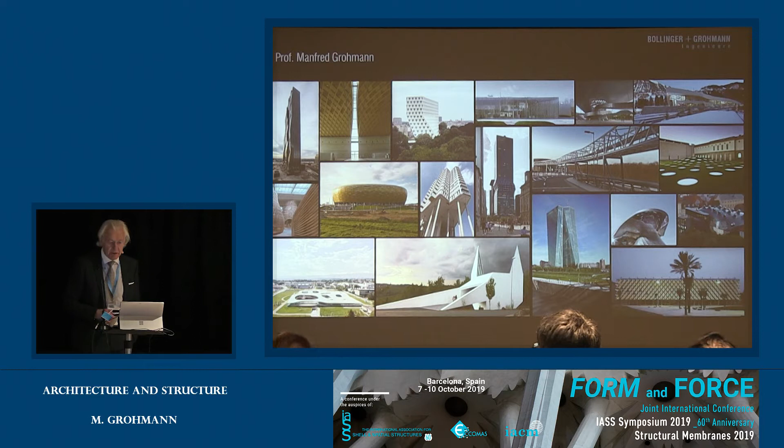Preparing this speech, I've been questioning myself: why am I standing here? I'm standing here since I'm working together with this wonderful, wonderful bunch of people. Almost 250 of them spread almost all over the world. We are in Europe and also in Shanghai and Melbourne. And without these people, none of these projects that I want to show you now would have happened.

So I want to talk about the past, the future, and the present, so about everything. And I start: the first project is pretty much connected with music, with jazz music, which I'm a big fan of. And this is Joe Zawinul. He was an Austrian jazz musician, and he was the man behind Miles Davis moving into electronic jazz. He was a keyboarder for things like Bitches Brew. And later he joined with Wayne Shorter for the group Weather Report.

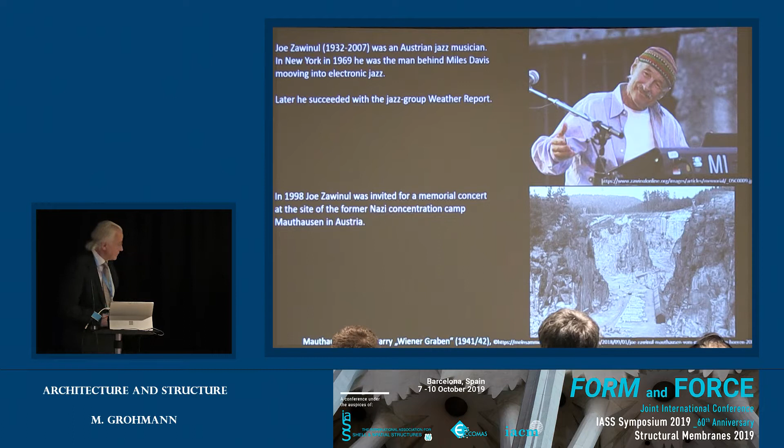And in '98, Joe Zawinul, since he came from Vienna, Austria, was invited for a memorial concert at the site of the former Nazi concentration camp in Mauthausen. And the site is quite an impressive stone quarry. So to have a concert there, the idea came up of having a cable net spanning over this quarry for two purposes. One is for an acoustic sail above the stage to improve the acoustics, and to find a place to hang the loudspeakers and all the spotlights necessary.

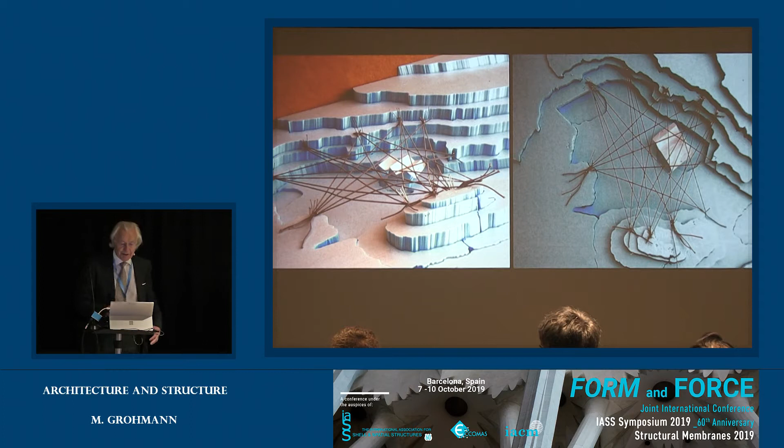Well, in '98 digital tools were not so available. I will come back to this issue also for the other projects we did in the 90s. So we tried to set up, you can see, a very rough model, to identify the points where the cable net could be placed, and then of course you have to define the length of the cables, and here we could cooperate with a very, very competent contractor from Austria. And this is then the acoustic sails above the stage, and this was the event, though it was just a temporary structure, just for one night, for one concert.

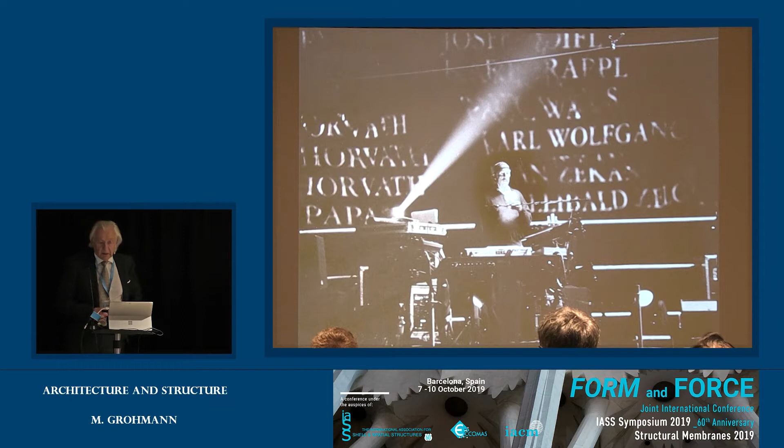The next project is also connected with art. This is about Tomás Saraceno. For those of you who attended the Hamburg Symposium 2 years ago, we had Tomás Saraceno as a keynote speaker. Tomás studied in Argentina, in Buenos Aires, and then he came to Frankfurt to do a postgraduate architectural study at the Städelschule. That's where we met Tomás, and for more than 20 years we have been cooperating with him. And he had come back to explain what you see.

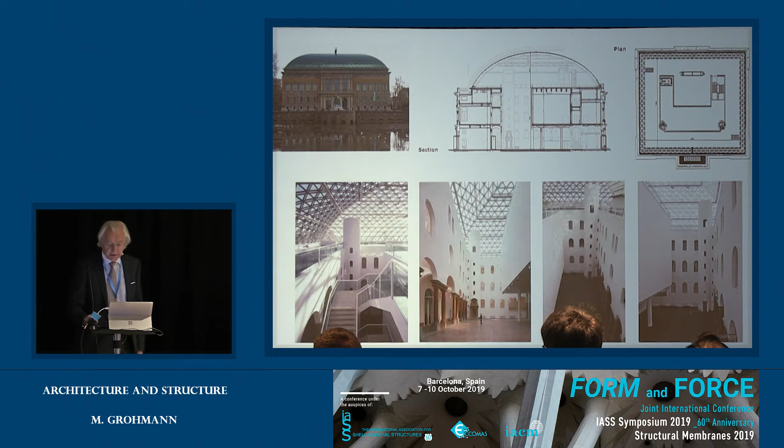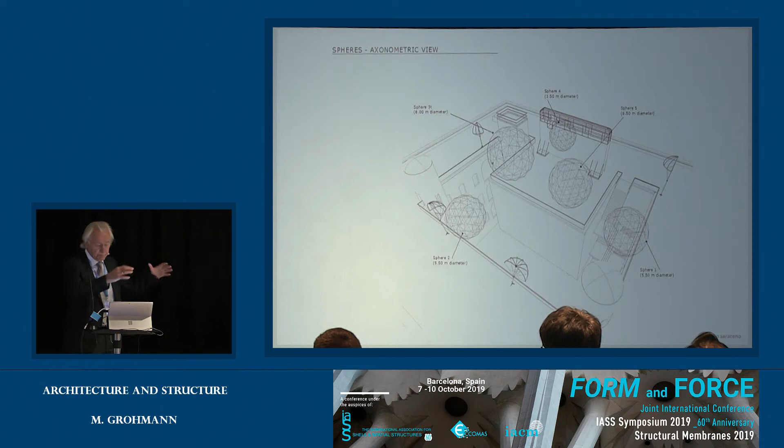He's pretty much involved in the research on spiders, how spiders build their nets, what type of nets they are building. One of his issues is to build accessible nets where people can walk on. And so he developed the idea which is in Düsseldorf for the Kunsthaus K21. They have an inner court, and on top of this inner court there should be an accessible roof, and to have the necessary curvature for the cable net, some high points had to be developed. We used the existing structures and added additional spheres where we could put the cable net on.

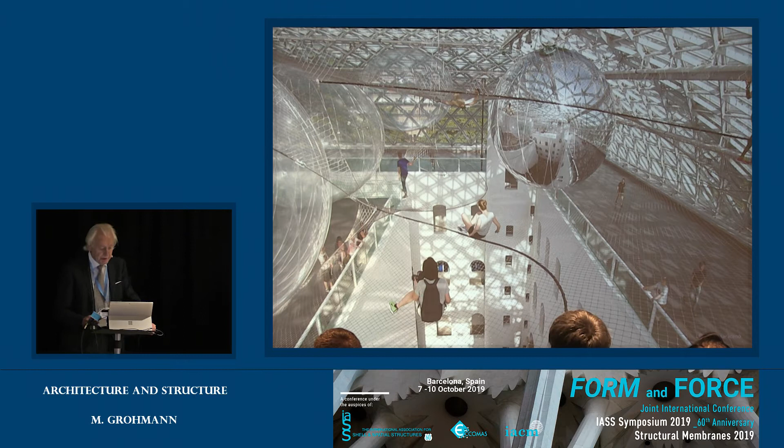And at the end of the day, it looked like this, and it was really a very big attraction, staying there for almost 1 year. People could go on the net, of course, with only a reduced number of people at the same time, but it was very prominent, and it was really an exciting event.

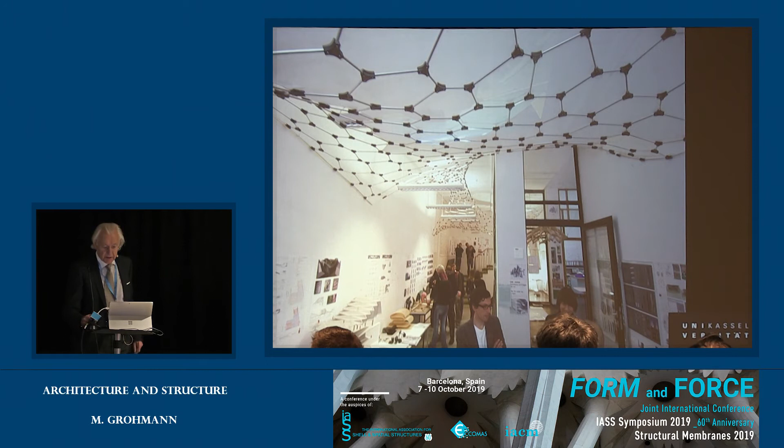A similar installation we did at a university: form finding for an almost bending-free hanging structure, interior structure, then a Voronoi structure. All these nodes are similar, yet each of them is different, so the geometry of each node had to be developed geometrically and then milled down. I'm sure most of you know this technology, but this was 15 years ago, so at this time there was no Karamba or no tools available. We had to script it with Visual Basic and C++, and to find the interfaces between the different programs. A similar project in a different scale, the self-supporting framework.

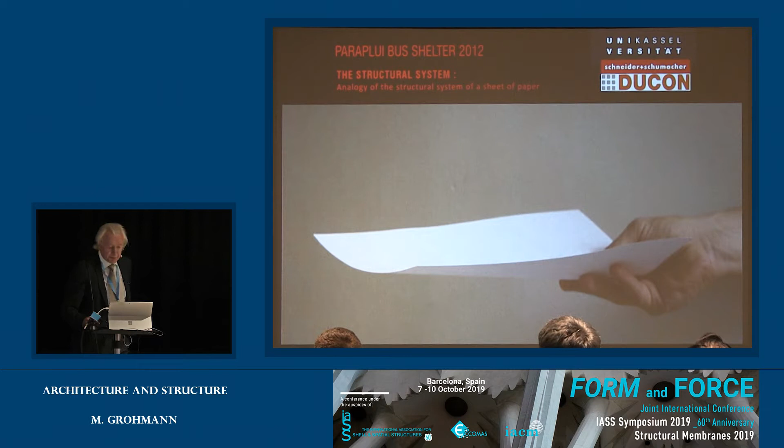This project, a university project together with Schneider Schumacher, Frankfurt-based architects, to explain more in detail. You see a sheet of paper, a folded sheet of paper, and due to the curvature, we have structural stability. We have tension at the top edge and compression at the bottom and the center. So the compression is stabilized due to the curvature. If we get rid of the curvature, it's just a sheet of paper that hangs down. We have buckling of the edge.

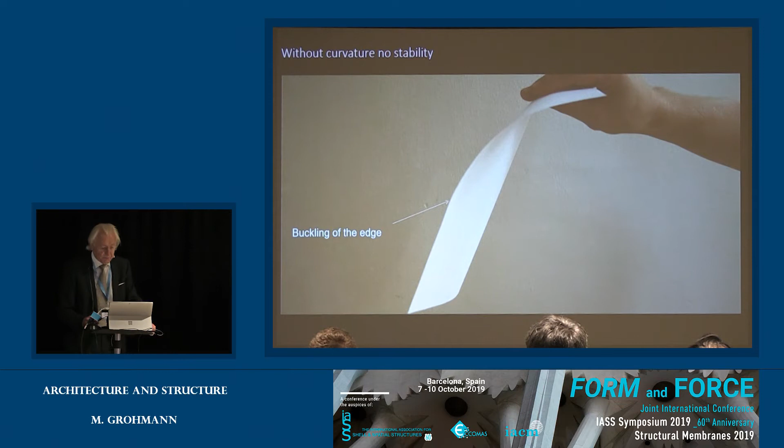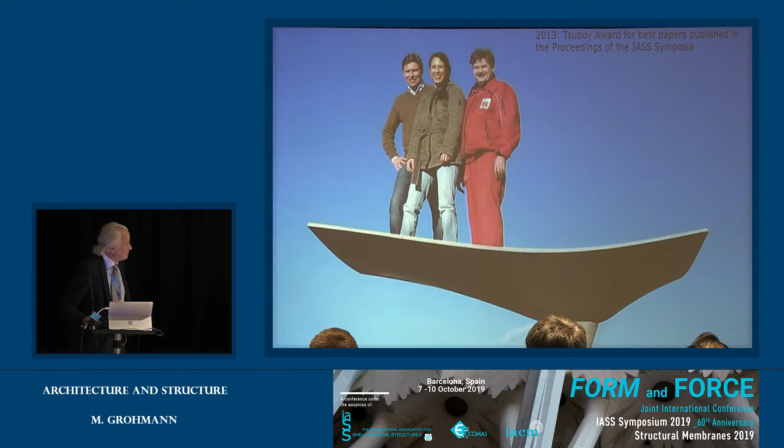With this principle, of course, again, a structural optimization. We used ultra-high performance concrete with a micro mesh reinforcement. So the edge thickness has been only 25 millimeters. And for this project, we received 6 years ago the Tsuboy Award for the best paper. We had a lot of fun developing this project.

A similar thing we also did at university here. Our students did everything from form finding, form developing, form optimization, building the formwork, putting in the reinforcement, and mixing the concrete and pouring the concrete. Those of you who have worked with this ultra-high performance concrete know how sensitive this material is. So it's still existing. It's used as a kind of bench, a Möbius bench.

When I look back, this project we did for BMW in 1999, 20 years ago, for the International Automobile Exhibition in Frankfurt. At this time, BMW wanted to promote the hydrogen technology. 20 years ago, where are we now? I don't know what happened to the German car manufacturer, but this is another issue.

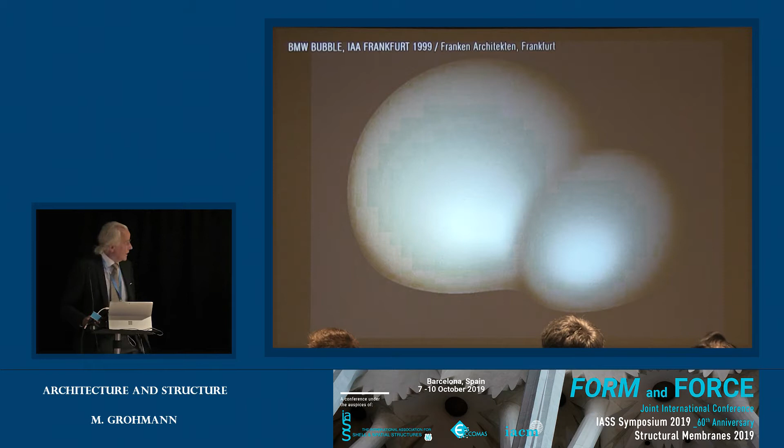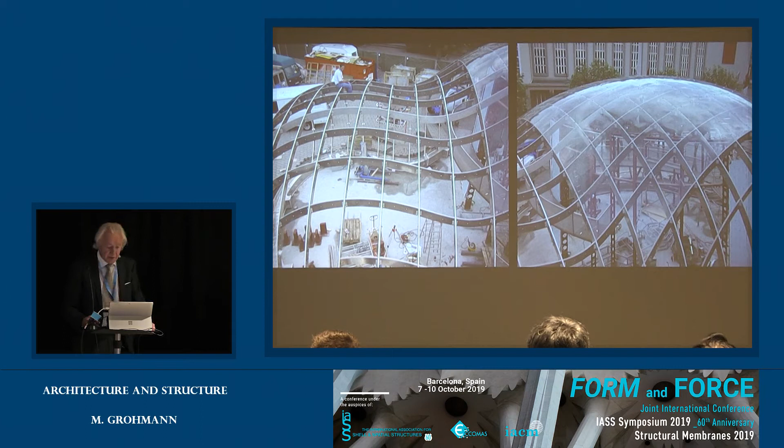So how do you build such a thing? We rationalized the structure in sections. Each of these sections then was set up with aluminum flats, and for the cladding we used acrylic glass, which you only have to heat up to 170 degrees, then you can easily bend it. So we had about 300 different sized, different shaped elements of acrylic glass, and a nice thing has been the door. How do you walk inside such a building?

I said 20 years ago. For this project, I think we were one of the first using Rhino, which at this time was still a beta version which you could download, using Rhino for a professional project. But at this time we had no other chance, and it turned out to work quite well 20 years ago.

A few years later, in 2003, Graz, which is in Austria, was elected as the cultural capital of Europe, and for this they launched a competition for a Kunsthaus, which should be erected not inside the old listed city, but outside as a kind of urban refurbishment of this area. It looks like a strange potato, but inside it's a real building with 2 floors.

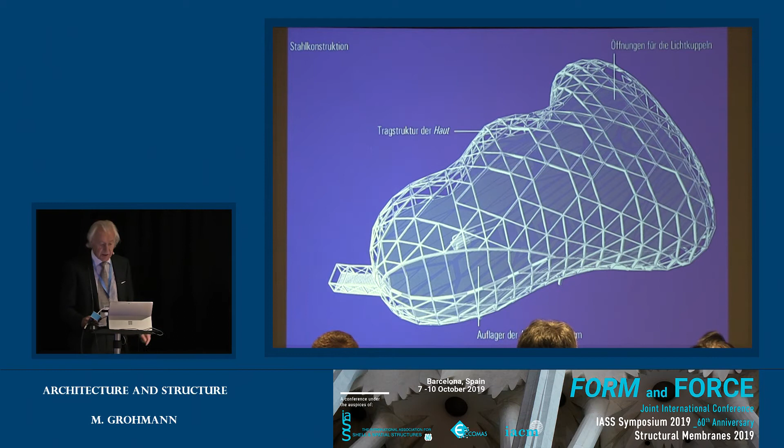We optimized the form a bit, to find this triangular shape. You see the hexagons for the skylight, which then should be prefabricated. You have to develop a scheme, and then you have to test it. You have to do a one-to-one mock-up, and this is the structure with these triangulated elements in between.

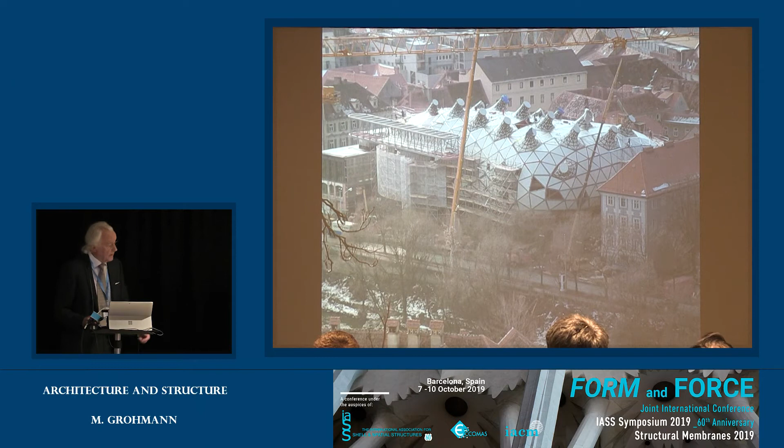The cladding was another question using acrylic glass, but acrylic glass is inflammable, so together with the authorities we had to find out the proper mixture. I think Harald Kloft is here. At that time we were working together with him, and he was pretty much involved in all these details.

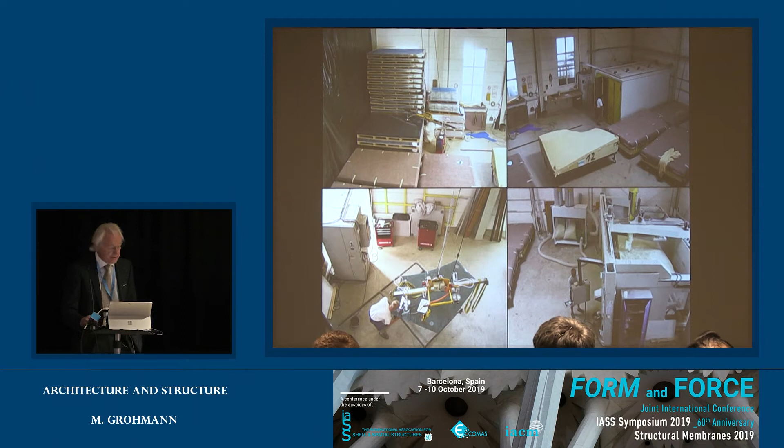Again, acrylic glass. You have to develop the geometry for each of these elements. You have to cut them. You have to bend them, and then they are shipped on site in this way. There was no fixation. We had to develop all these fixing elements, how to fix it to the facade. You see.

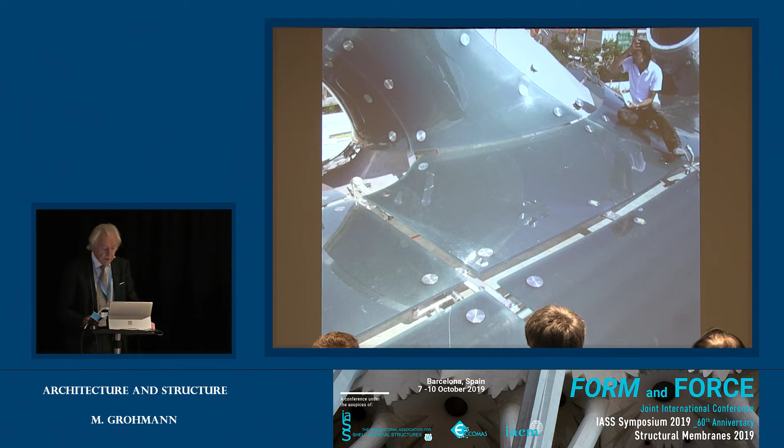This facade, or the roof, is it the roof or a facade, is sprinkled from above and from underneath, just to make sure that it is not inflammable. And this is the building, nice shape. And underneath this acrylic glass, there are some lights which are able to project moving pictures onto it, and this is the urban setting.

And when you now go there, the urban idea worked. So people are crossing the River Mur. They are going on the other side, and this whole area, which goes towards the main station of Graz, has now undergone a real urban retrofitting.

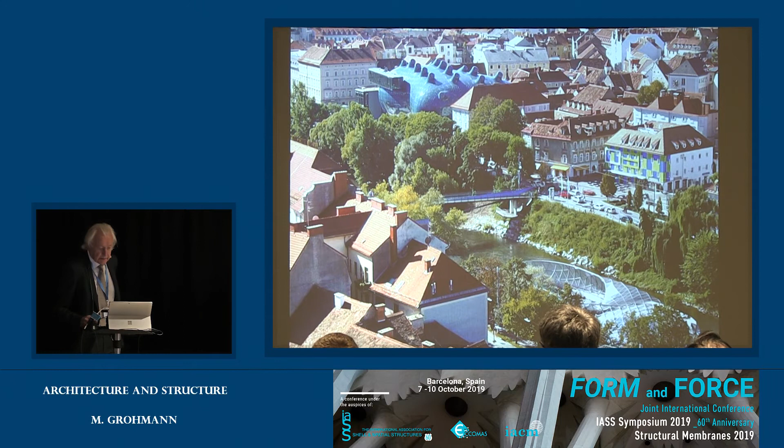A jump in material. There was a competition for the Rolex Learning Center launched in 2005.

We've been in this competition. We were already in the competition with SANAA, Tokyo-based architects, and they developed just a one-story building sitting on a kind of landscape. And this was the challenge, having a shell. I really would not call it a shell. It's more a bent plate, which due to the bending induces a lot of normal forces. So we have a slenderness of 1/18, and it was really a challenge to do it.

And we had two challenges. One is to find a system that could work, and the other then was how do we bring this information on site? How can we develop a formwork that has the necessary accuracy? So this was the idea of the restaurant of EPFL for the groundbreaking ceremony.

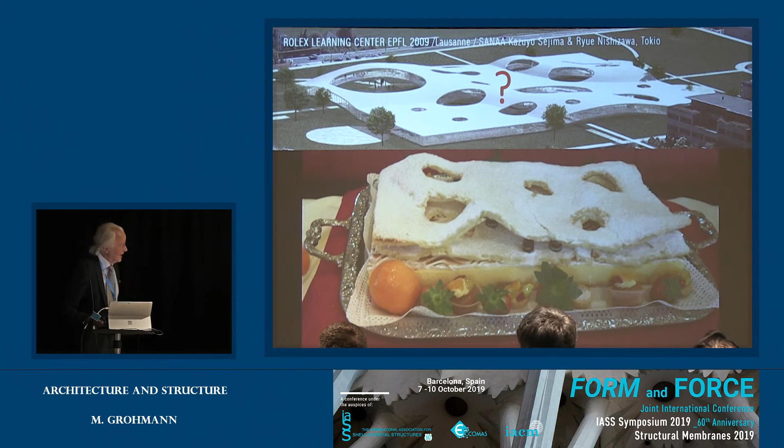Of course, after having done our form optimization, minimizing the bending moments, we could then tell the site the XYZ coordinates of each point, and here they wanted to have it in a 50 centimeter grid, but with this information you can build nothing. You can control what you have built later on.

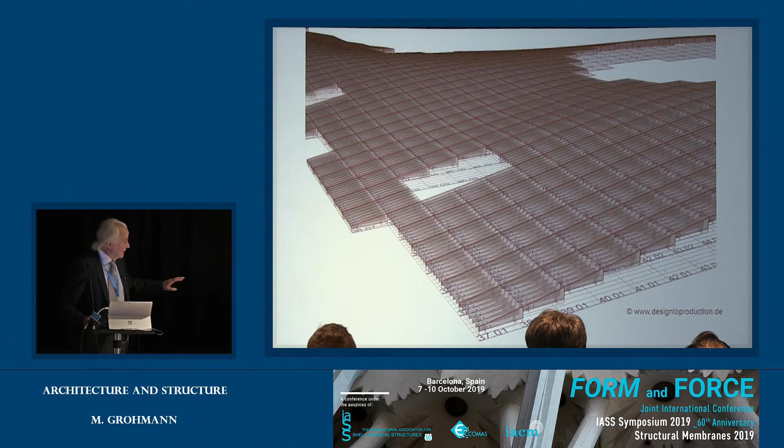We had some experience of building double curved concrete walls from a project with Frank Gehry, and so we transformed this experience into a horizontal. So we developed boxes 2.5 by 2.5 meters, each of them individually curved, individually shaped, and these boxes could easily be nailed together, then shipped on site, erected on a scaffolding with a certain height. At the end, we had this almost perfect surface that could give us the necessary accuracy.

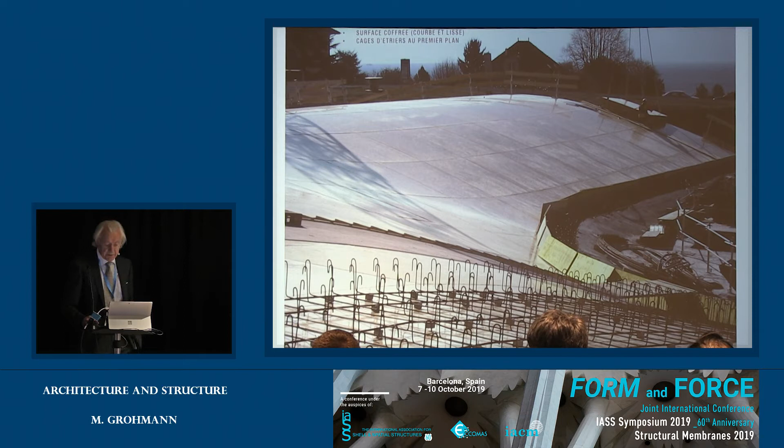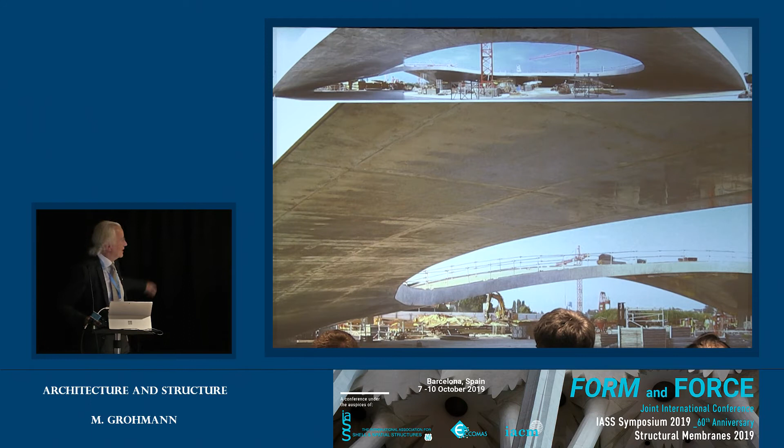For the main reinforcement, rods with a diameter of 50 millimeter, which had to be welded together, since an overlapping joint for such an element close to the surface is simply not possible. And this was the outcome. Being a structural engineer, I was satisfied. This could have stayed this way, just this flowing concrete surface. But this is the built thing.

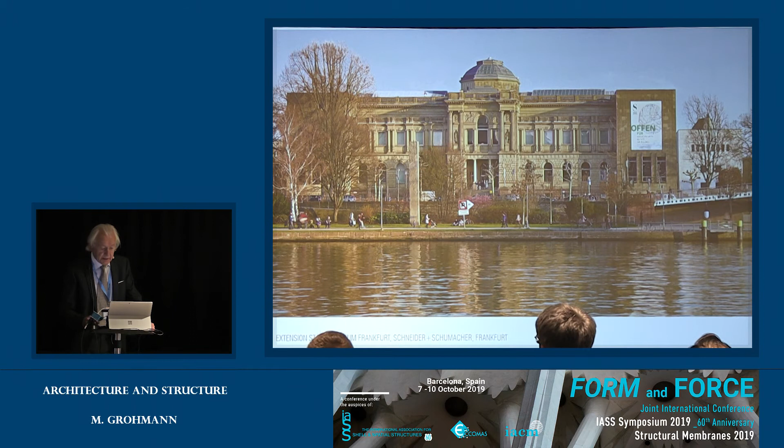My next project, a few years later, again a concrete structure. What for? For the extension of the Städel Museum in Frankfurt, again with Schneider Schumacher architects. It's Frankfurt's most prominent fine art museum, and in the competition we developed a place for the extension, which was the garden. So underneath the garden we could have this thing, and having a concrete shell on top of it, curvature optimized to minimize the bending forces. This is the surface. Then we have the skylights.

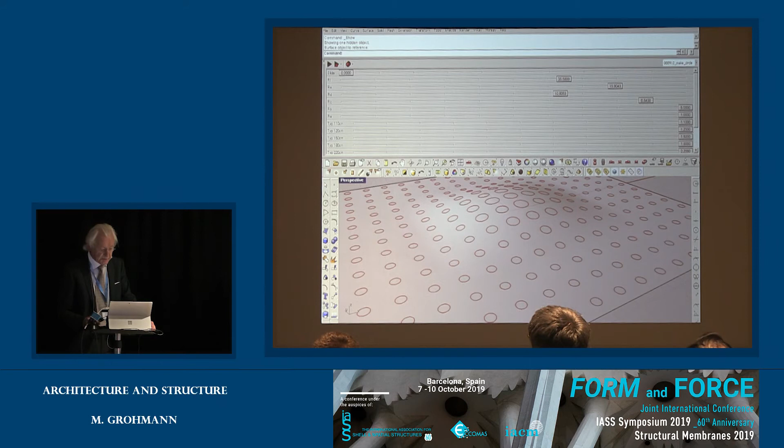We had to develop the exact geometry of the skylights, again mapping these skylights onto this Rhino surface, and then a similar system like in Lausanne, but here we have an interior surface for a museum. So these are blocks of foam covered with a fiber reinforced composite. This is just 1/4, though these elements could be used 4 times.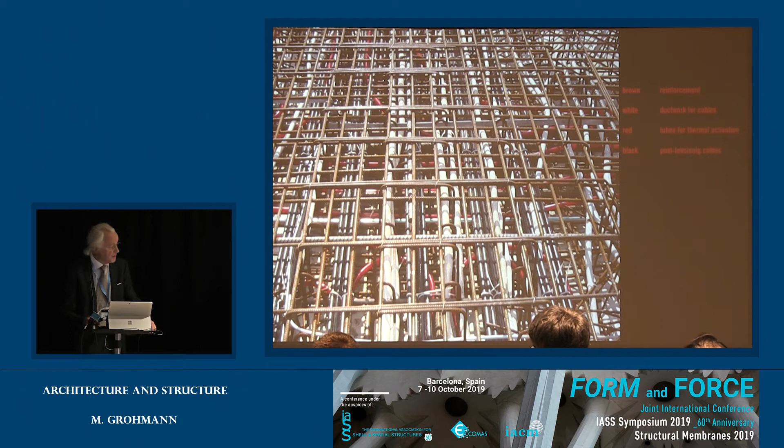And then when you look at the concrete, you see the reinforcement, you see the ductwork for the electrical cables, you see the tubes for the thermal activation. The room is heated and cooled with this slab. And last but not least, you see the post-tensioning cables for the area which is flat, which has no curvature.

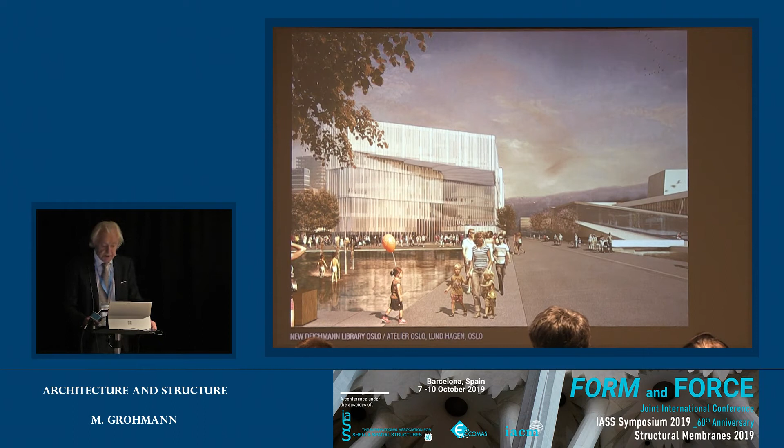The next project is again a concrete project, but here no curvature, but a folded concrete plate for the Deichmann Library in Oslo, which is still under construction. Why this cantilever of the uppermost floor? This cantilever was the idea of the architect, already in the competition, to allow the visual contact, to allow the sight line to the opera house when you leave the main station. You should be able to see the opera, and so the space we took away for this sight line was then put into this cantilever on 2 sides.

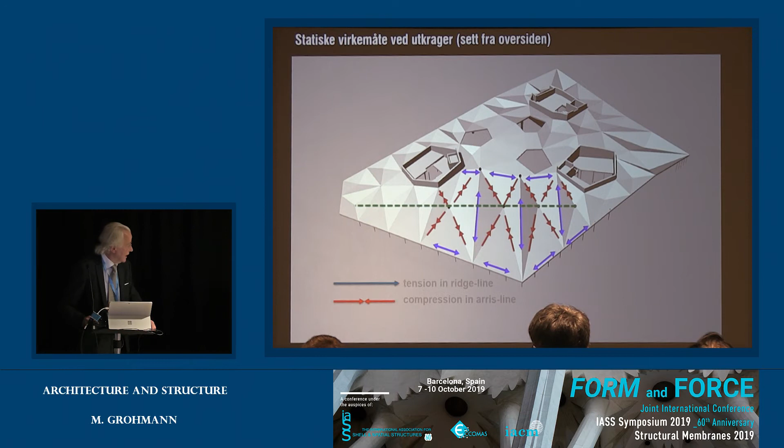After discussing several alternatives, we ended up with having the roof as a folded plate which is cantilevering above this green line. So we have tension in the ridge and compression in the arris line, where the compression goes onto these concrete columns. And then the floor underneath is suspended with these thin steel bars from the roof.

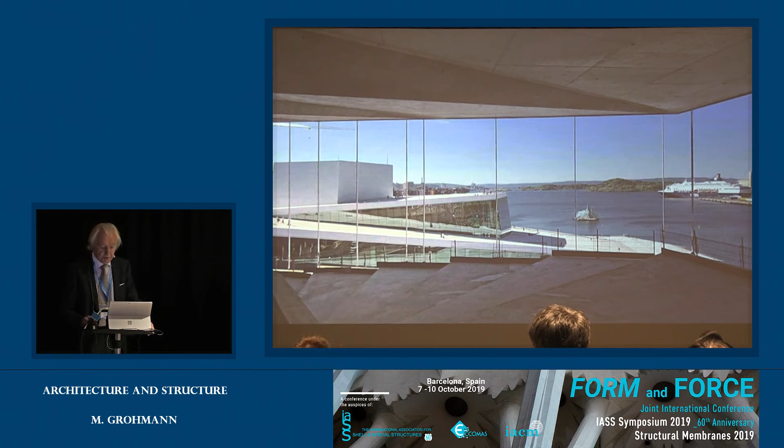And this is the construction site without the facade, the view to the opera house, the view from underneath. And this picture I took just 3 weeks ago. The opening will be in spring next year.

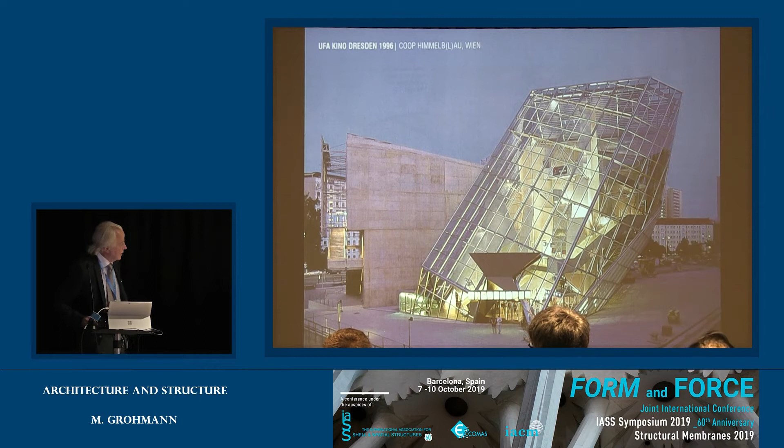In the last almost 25 years, we had quite a close cooperation with Coop Himmelblau, Vienna-based architects, and this project for the UFA cinema in Dresden was our first project we did together with Coop Himmelblau, completed in '96. We started in '94. In '94, just AutoCAD 3D was available.

RSTAB moved into 3D structures. It was really a challenging thing in those days, for us at least, to do such a thing. We had a physical model, and just by pressing on it, we could define where we need some extra diagonals, some extra struts to make this foyer happen and make it look like it looks now.

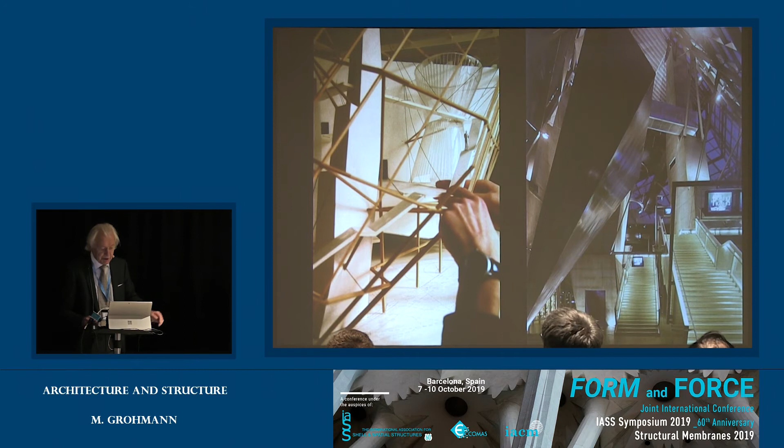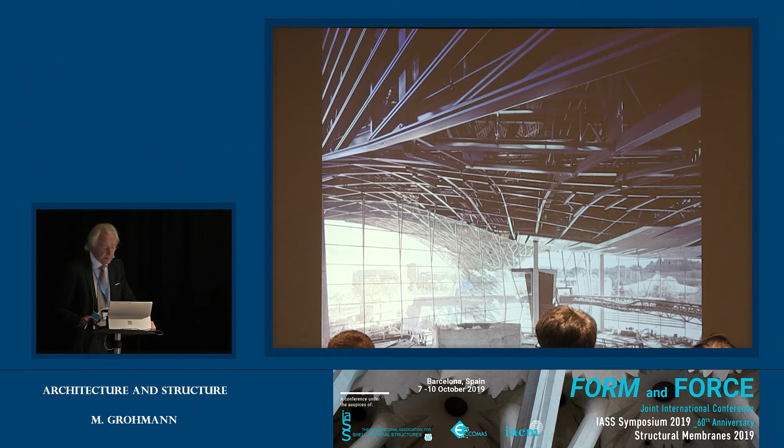Another thing with Coop Himmelblau is not the Olympic Stadium, but this building just on the side of the Olympic Stadium, the BMW Welt. The idea of the architect was a cloud, and underneath this cloud, the whole kind of marketplace where all the activities BMW wanted to concentrate in this building could happen. And the challenge was here on one side the structural system, and the other thing the system for the cladding to allow this open space to happen. And now BMW is telling that they have more visitors than Schloss Neuschwanstein, though it's the most attractive museum we have in Bavaria.

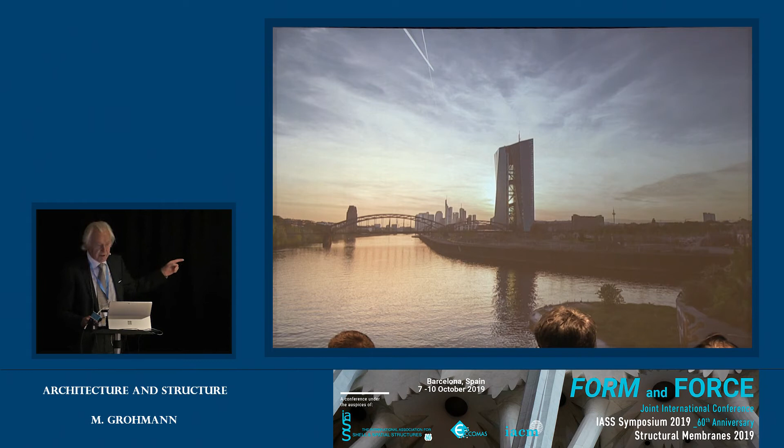The last project with Coop Himmelblau I want to show is the headquarters for the European Central Bank. Again, a competition. We started to talk about this competition in 2002. The completion was 2014, so 12 years of my life in this building. The premises include the refurbishment of this existing market hall, a very interesting concrete shell structure built by the same team who built the planetarium for Carl Zeiss in Jena. They then moved over to building these cylindrical shell roofs. So we did all the refurbishment in close connection with the authorities.

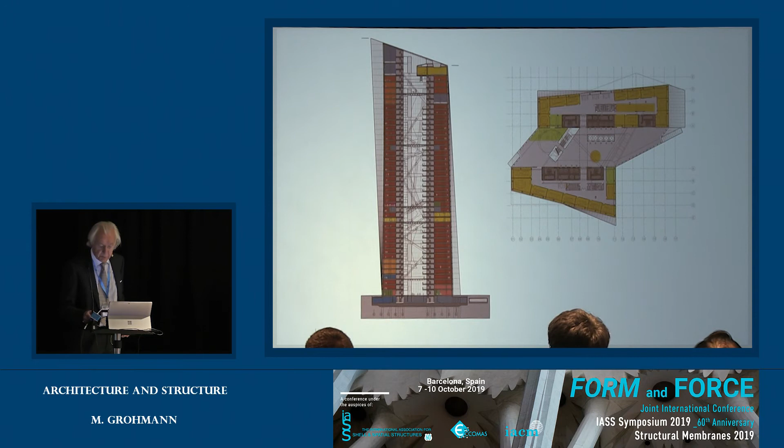The high-rise itself is just 2 towers connected via an atrium, and to make this structurally stable, we had to connect the 2 towers within the atrium. That means we had to develop a lattice system. The architect didn't want to have a regular system, so this was one of our first approaches to genetic algorithms. We defined some rules and then let the computer set up this genetic process. I think most of you are familiar with this, that you have to generate, evaluate, cross, and mutate from one generation to the next generation.

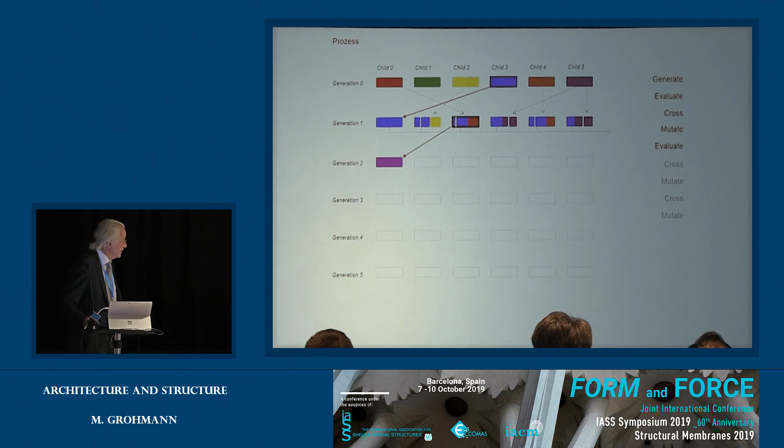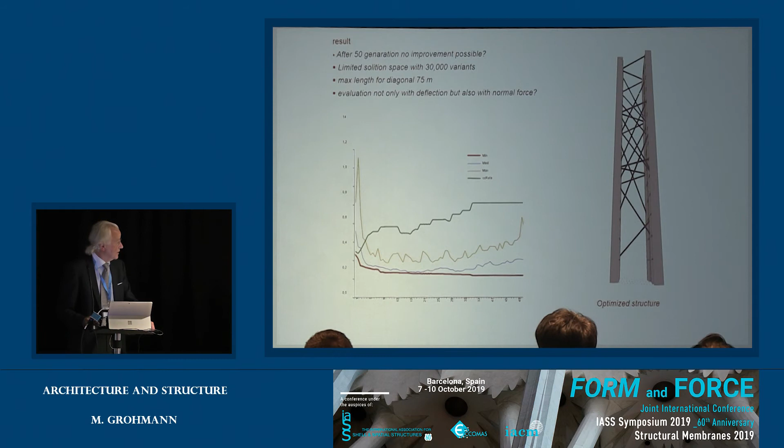And then the outcome in the beginning was we had a horizontal deflection of 400 millimeters, and we ended up at 235. Well, you must not look at the real number. It's just in this optimization process, so we could achieve something that is okay. Of course, then we had to do a real second-order calculation, taking into account everything and also the twist of the whole building. It was quite a complex process, but for the first approach to position these diagonals, this was really interesting.

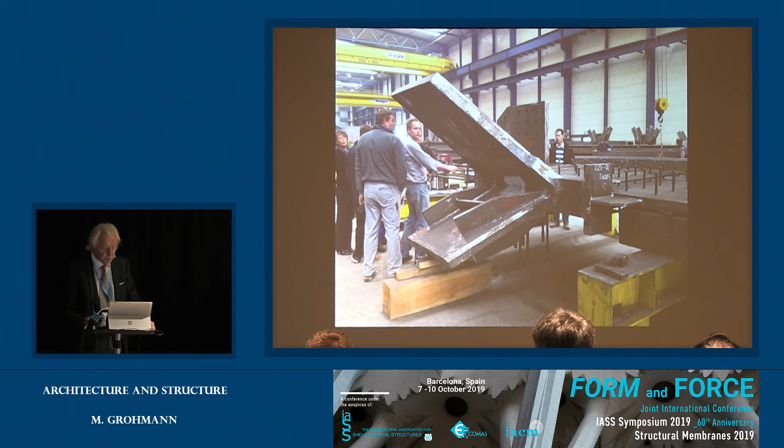The diagonals themselves, up to a length of 75 meters, are steel tubes, 1 meter by 1 meter with 100 millimeter thick steel plates. These are the connectors that we had to put into the cores. These diagonals, being too heavy to be lifted in one part, had to be lifted in two parts and then welded together in situ. But at the end of the day, the proportions look okay. It looks good. And also from outside, due to the curvature of the surface, from every side you approach the building, you find a different view.

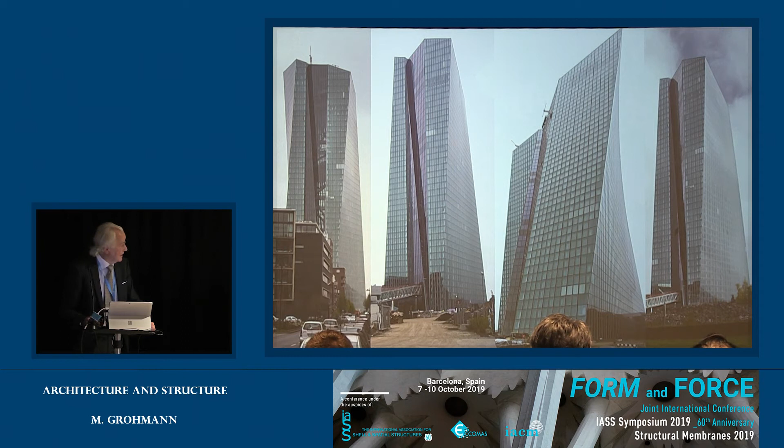Just some more high-rises we have been doing in Frankfurt. Someone called this Europe's highest residential tower, 200 meters in the city of Frankfurt. And another thing just being completed right now with BIG, this tower with a hip shake. It's a mixed-use tower. You have offices in the lower part and offices in the higher part. And where we have this hip shake, there is residential.

Here, one challenge was to do the construction pit, a 16-meter deep hole. So we had to do it in top-down construction, since the horizontal forces on the perimeter wall are too high. The first thing we had to build is this -1 slab. Then we had to dig out, build this -3 slab, and then another digging process to find the level for the foundation slab.

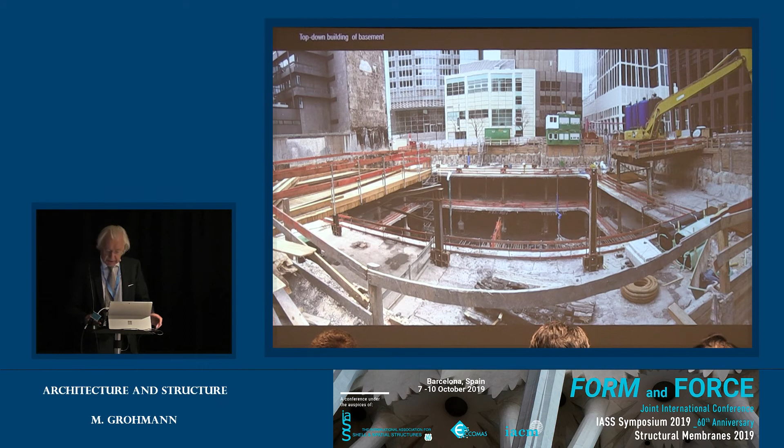As I said, almost completed, but right now we are working on this 4 towers project called Four. The architect is Ben van Berkel, UN Studio in Amsterdam. Again, a mixture of residential, hotel and also office building.

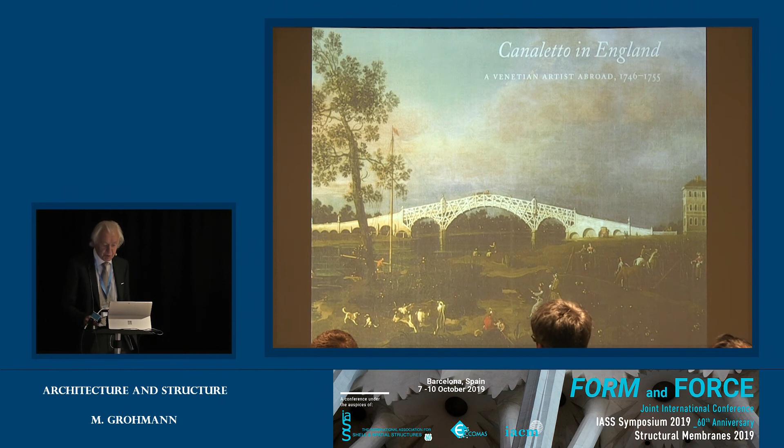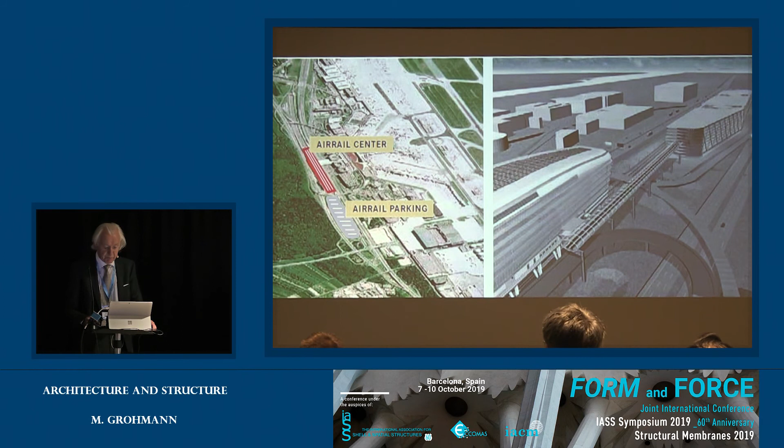And then you need a connection from the parking garage to the building, and this type of bridge was a bit too boring. So together with Lengfeld and Wilisch architects, we could bring in the idea of an irregular lattice girder.

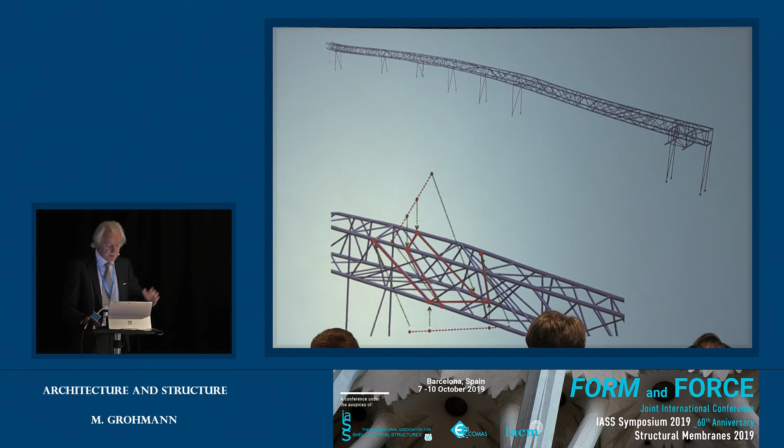So again, using a genetic algorithm, we had to define the maximum angle for the diagonals. We wanted to have only 2 layers of diagonals, and then set up an optimization process, having the computer define the final position of the diagonals. This all has been done with Visual Basic, finding an interface between the geometry and the structure in 2 directions.

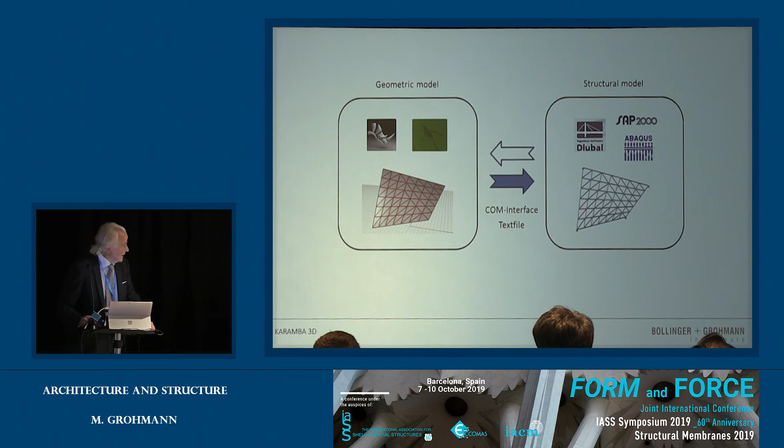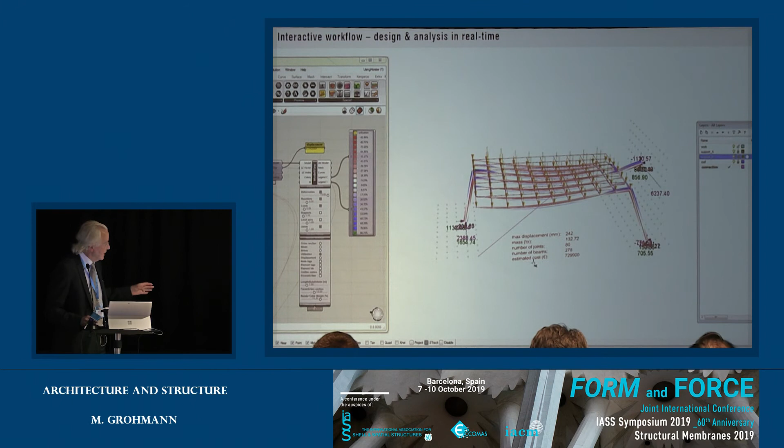And at this time, the colleagues in Vienna, together with the Universität für angewandte Kunst, got a research grant to develop Karamba, to bring this finite element directly into the Rhino Grasshopper family. And with this thing, you can define any structure with Grasshopper. You have to associate loads, you have to associate material properties, and then just by sitting at the screen, clicking, you can add struts, you can change the support conditions, and the program gives you a real-time answer in deflection or normal forces or bending moments, whatever you want.

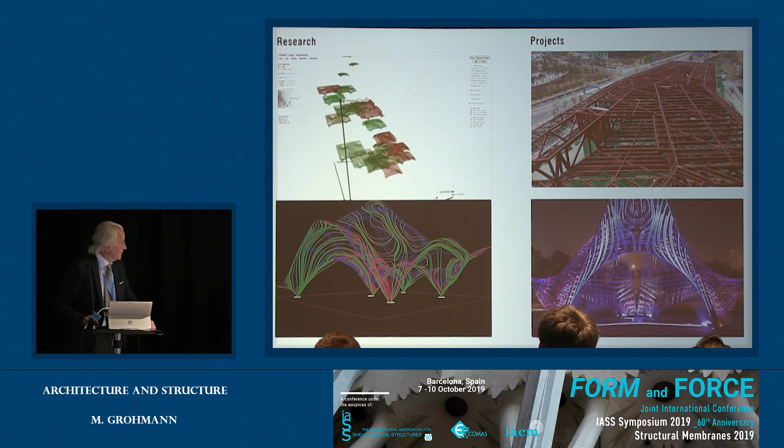And I think quite a few of you are familiar with this thing, and we still use it for research. We still have this connection with the university and use it for real projects also. So this is the background, and then all of a sudden, to be honest, I have not been really aware of this, but in the last 4 years, this has become a main driver for us.

What is the Paris Climate Agreement 2015? The nations signing this contract agreed to minimize greenhouse gas emissions by half by 2030, and then again half by 2040, and another half by 2050. This should happen in all these parts, food production, transport, and also buildings, which is us. All of you here. We are the engineers, we are the architects, and this is our task, to minimize CO2 production within the next 10 years by 50%.

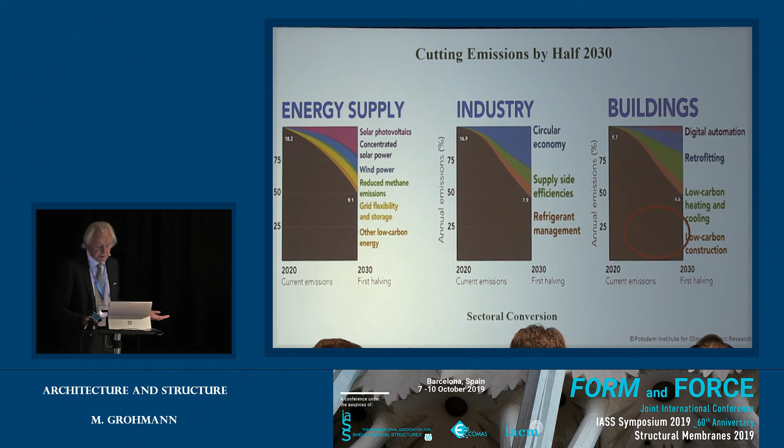I have no idea how we can achieve this, and I would be happy if someone has some ideas. It's really an unbelievable task that we are confronted with, but we have to face it, since building and construction account for more than 35% of global final energy use and nearly 40% of energy-related CO2 emissions. So this is our thing. This should be our thing for the next decades.

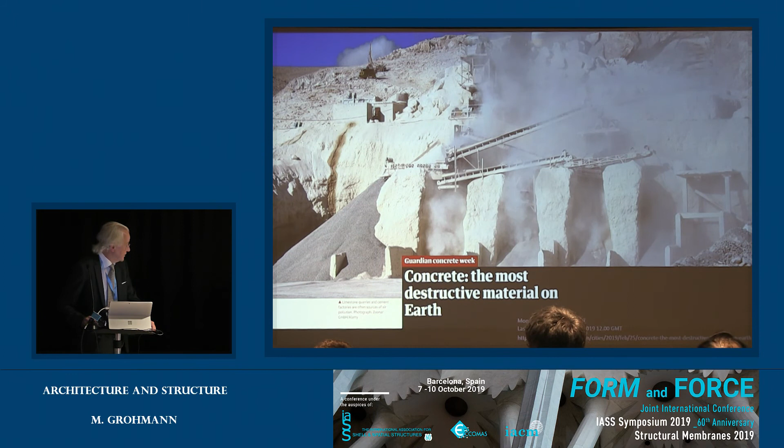Another thing, worldwide cement production generates more CO2 than global air traffic. Then The Guardian, February this year: concrete, the most destructive material on Earth. The world is running out of sand. To be honest, 4 years ago, I thought we had sand like sand on the sea, but sand has really become a problem, especially in Southeast Asia and in the Middle East.

And also here in Europe, in Germany, we have a problem. We are sitting on millions of cubic meters of sand. But if you want to open a sand quarry, you really run into severe problems. On the global scope, sand has really become a problem.

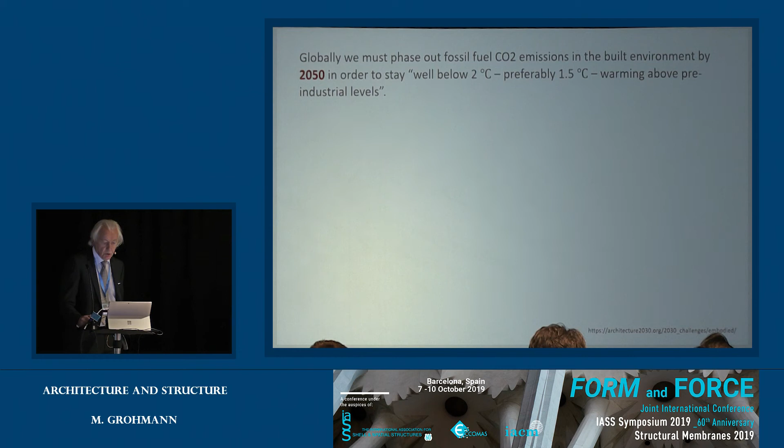So globally, we must phase out CO2 emissions to reach this 2-degree goal, and of critical importance will be this 2030 milestone. We have to try to achieve this CO2 reduction. If we cannot make this goal, then I think we will really have problems, and the researchers are telling us that climate change will then become irreversible. So again, this is the task for the next decade.

So one step in this direction is reduce, reuse. That means reduce the material whenever possible. Forget the flat slab, go back to a beam and slab system. Reuse: we do not have to tear down everything, try to reuse existing structures, and if not possible, then we have to recycle. In Switzerland, they use the word urban mining. In Zurich, you have to reuse 50% of the material you have on site. Otherwise, you get no building permission.

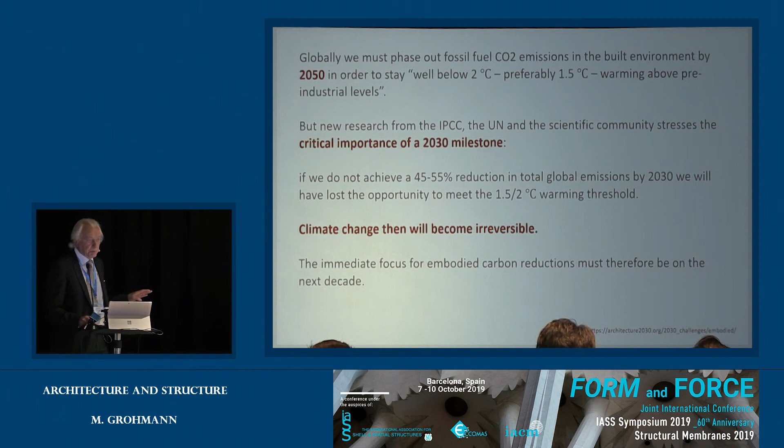These are things we have to take care of, and the other thing is that we have this wonderful material, wood, outside. The more timber you use, the more CO2 you take out and store in your building.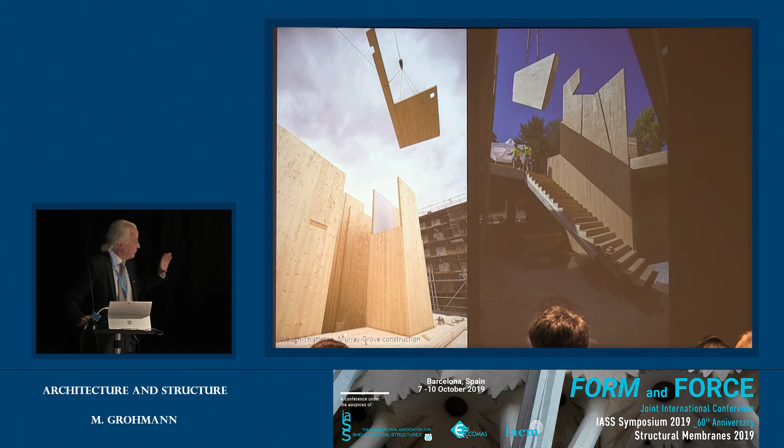Just one project we finished in 2017 already. Modular system for extension of a school. When you attach a facade to it, neither from outside nor from inside, you see the timber, of course, but what you do not see is that it is a modular structure.

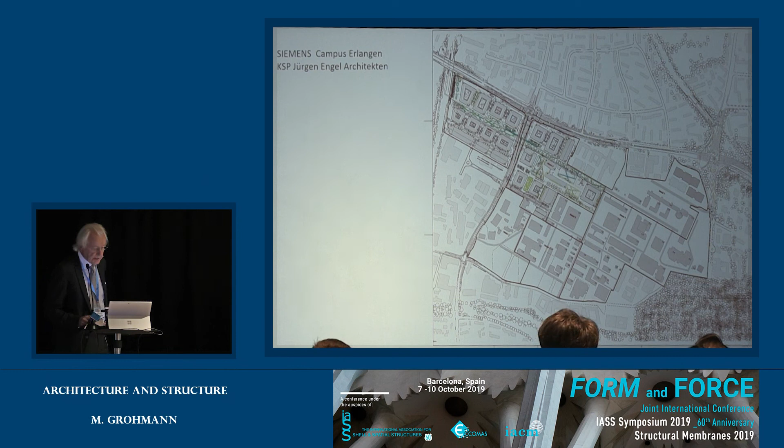And beginning of this year, we've been working for Siemens campus in Erlangen, Siemens headquarters, so to say. We've been together with KSP Jürgen Engel Architects. We designed a completely concrete building with a concrete flat slab, a span of 8.1 meter, which is normal, 30 centimeter thickness.

And then they went onto the market, and one company came using a system, CREE, that was developed by Rhomberg, an Austrian-based system. And what do they do? They have timber and concrete composite panels. They have glulam columns for the facade, and in the centre they have a steel middle girder to collect the load, and then steel and concrete columns.

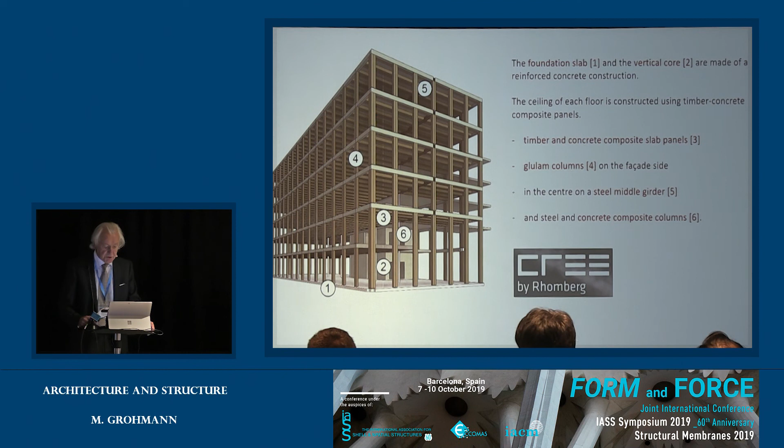And this is how the system looks. These are the prefabricated elements. So also on site, we do not have to use so much concrete poured in place, which produces a lot of noise and garbage. That's how the system can look.

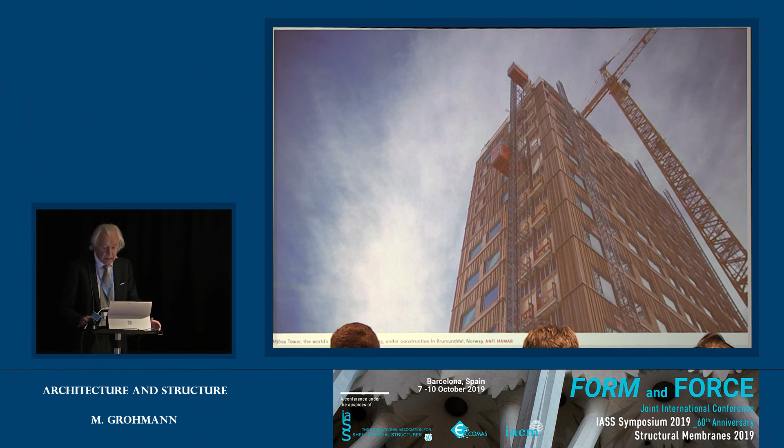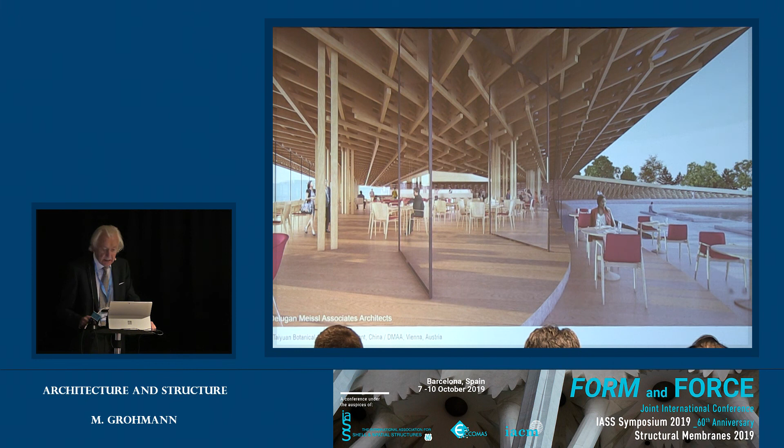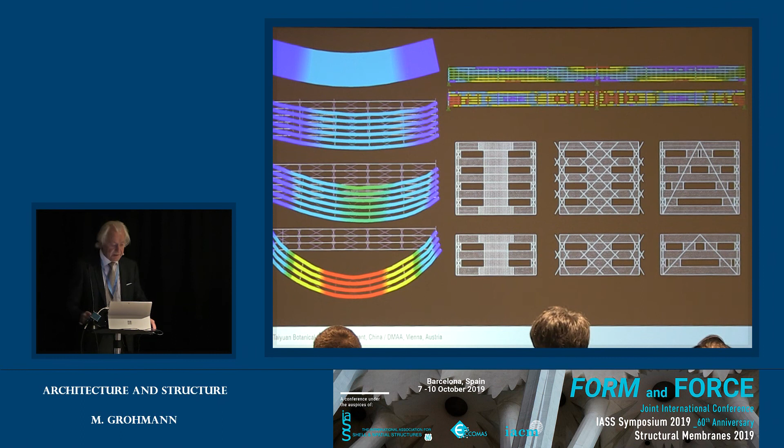And this is the last project. It was a competition in Taiyuan Botanical Garden. We've been in it together with Delugan Meissl, Vienna-based architects, and we had the inspiration from this Chinese building technology with cantilevers, laying one beam onto the other. Of course, being a structural engineer, if you have beams laying one on top of each other, you want to connect them, you want to get the necessary shear stiffness to activate the structural height.

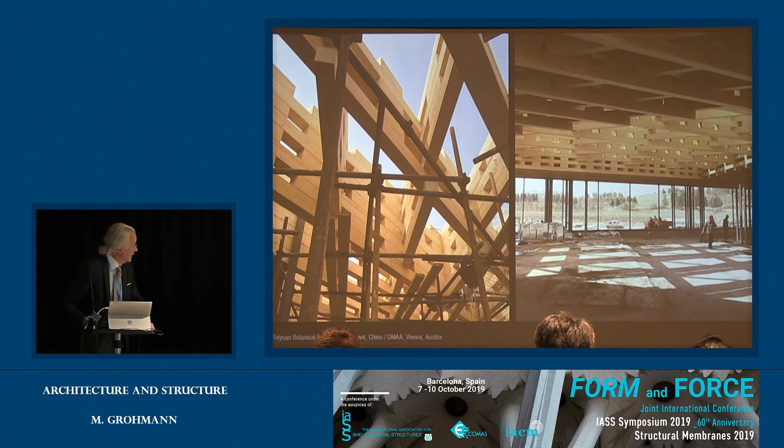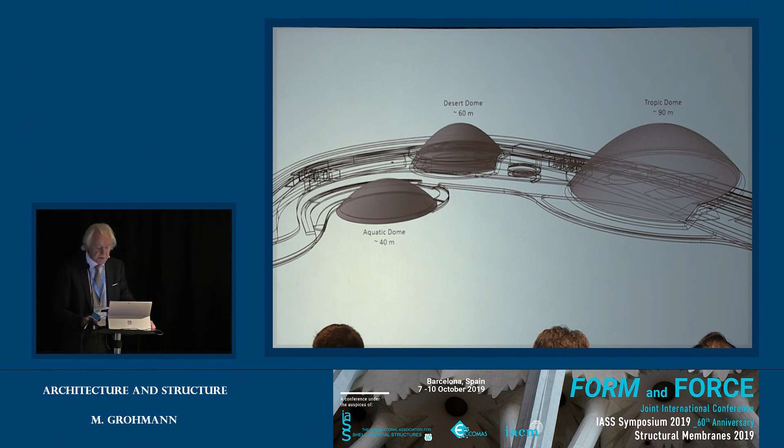Where we have this support, we have a bigger structural height, so the structure is more dense, and from underneath it looks like this. And then this is a rendering, and this is the real thing, how things are built on site. And here you see the scale of the whole building. Still under construction, and the project contains three domes. Each of these domes will have a different climatic zone inside.

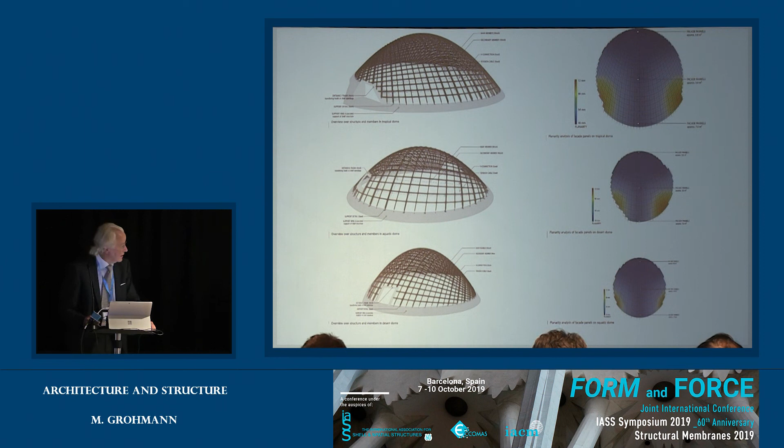And no regular symmetrical structure. But we wanted to open the building to the sun, to get as much sun into the building as possible. So we developed this structure with two-layer beams in the primary load-bearing direction, and the other just for stabilization, just one layer. What you see blue is the roof structure itself, the tiling. For the blue part, we can use flat elements, and only where the curvature is getting yellow and red, we have to curve the glass elements. And this is a rendering.

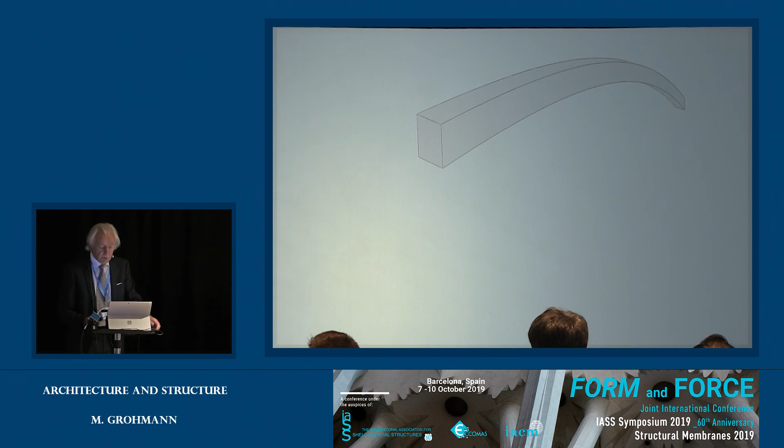Another thing is when you attach a beam in such a direction on a sphere, you get some torsion to have the surface of the beam perpendicular to the surface of the structure. So each of these beams is then milled down in a way that the surface is parallel. So these beams are again individual beams that just sit in that place.

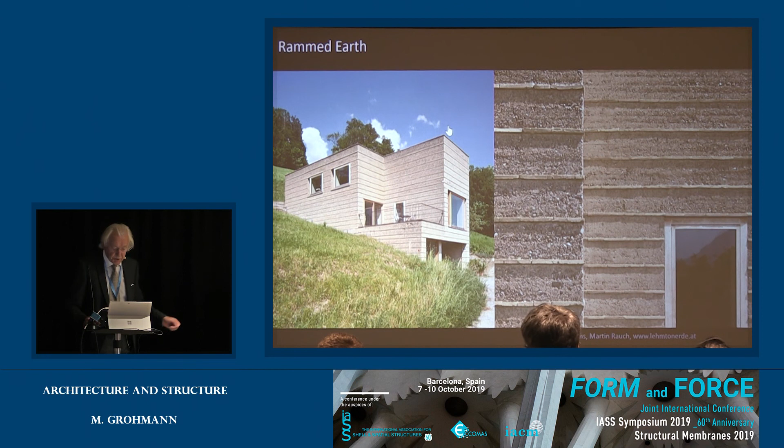And the last thing I wanted to state here is we have no experience with rammed earth, with this material, but this material is around, and I think this is a good time to talk about it, at least to give you the idea that there is something new. And in Austria we have Martin Rauch from Lehm Ton Erde, who's been building the exterior wall for this Ricola Kräuterzentrum, together with Herzog & de Meuron. Here you see the happy architect Pierre de Meuron with the building.